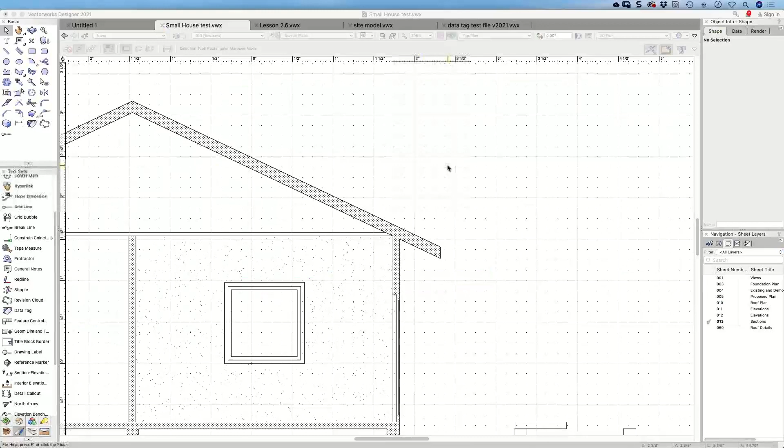I've got a little test house here that we're going to have a play with. Some people were asking what my favorite things was, and someone else would like to see how materials work in Vectorworks, so I guess we could focus on those. I haven't really played with materials a whole lot yet, so it'll be a little bit of experimentation for both of us. Richard would also like to look at the new door and window types we've got. But one of the first things I was going to look at was how to speed up your workflow.

There's this new thing in Vectorworks called the smart options, these things here, and I like them a lot. So I was going to go through those and show you what I've done with them.

Back to Vectorworks preferences, smart options display, and I'm going to choose one here. I've actually made a little palette, I've called it Pet Palette. When I go to my smart options, it just has the tools that I want to use, the tools that I use on a regular basis, things like dimensioning, some 3D modeling tools, some things like reshape, mirror, rotate, the sort of editing tools that I use regularly.

Now, there are some tools that I remember the keyboard shortcuts for, and the keyboard shortcuts are still the quickest way to work. If you don't remember them, there it is: Rectangle is key number 4, circle tool is key number 6, the polygon is 8, the walls are 9, and so on. Those are still the quickest way to get access to them.

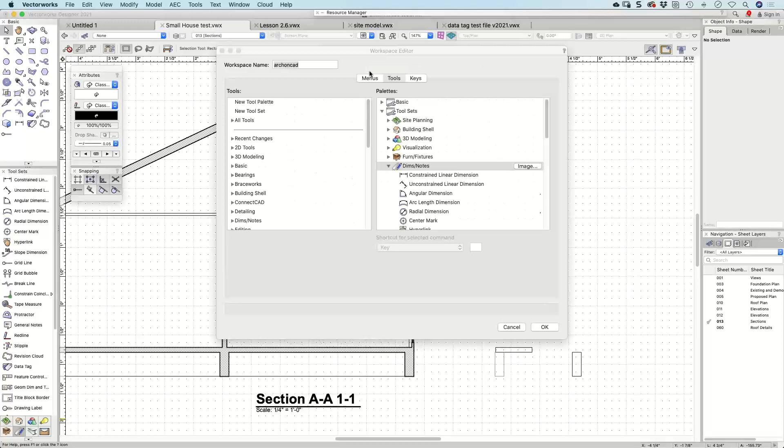And the way you make them your own is to customize your workspace. I'm going to create a new palette—a new tool set is what I need to create—and put it in here. Now in here I've got my new tool set. This is where I hide things I want to hide. Let's change the name of this and call it My Smart Options.

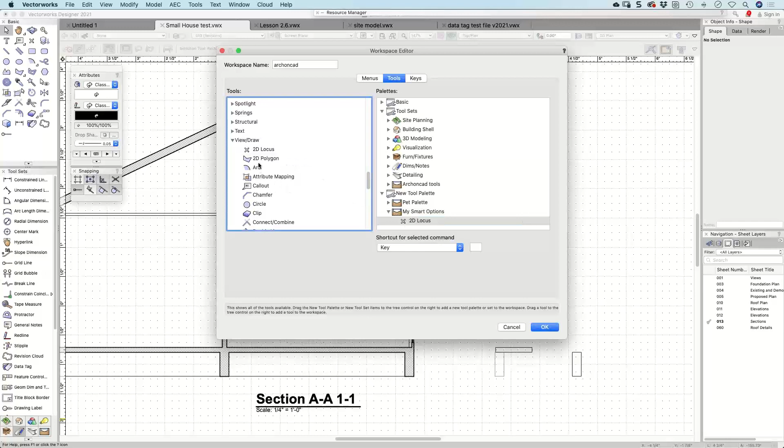So now start putting the tools that you want into My Smart Options. If you like 3D modeling tools, put those in. If you like basic tools, dims and notes, creating, or viewing and drawing tools, put those in. Just put in the tools you think you like, the ones you use all the time, and put them in here. Then you can add that to your smart options.

Just wait for my screen to update. So let's go to my Vectorworks preferences, and now you can change and put My Smart Options in there. Let's try that—spacebar, My Smart Options—and there's only the tools I put in.

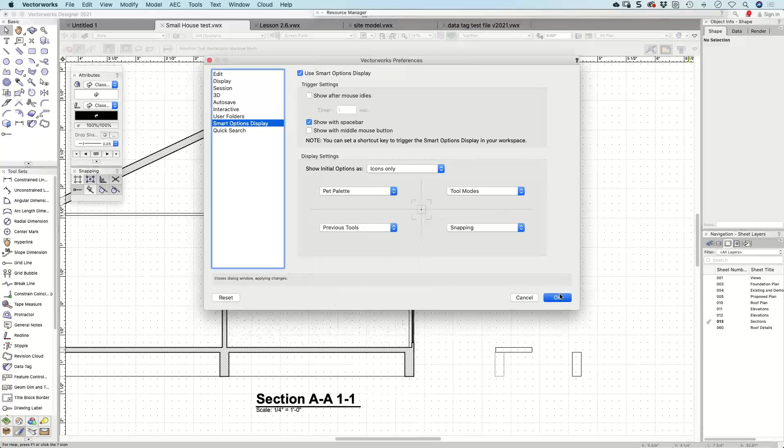So that's the way I would use the smart options. I would put in the ones that I like, and it's just a matter of keeping track of the tools I like and putting those in.

One of the things I'd like to go through today, if it's all right with you guys, I'd like to look at materials later, but I did wonder, Richard, whether I should look at something like these detail reference tools. Now, those of you that don't know what I've just done—I've set up multiple views on my screen. Vectorworks has had multiple views for ages. This is a rendered view, this is a sheet layer of a section, and this is a sheet layer view of my details. So I'd like to put these detail references on here so we can have a look at it.

So what I'm going to do is go through this one here—this is actually named Eaves Detail, and down the bottom I've named this one My Barge Detail. Those of you that have listened to me before know that when I create viewports, I'm quite particular about giving them names, naming each viewport so it's easy to find.

So I'm going to right click and edit my annotations. I've actually got my right click, or my annotation set, so that double clicking on a viewport edits the annotations. If you don't know where to get this, right click, choose edit, and set this to do what you want most of the time. If you edit the crop most of the time, set it to crop. If you edit the design layer most of the time, set it to edit the design layer. I edit the annotations a lot, so I've got mine set to edit annotations.

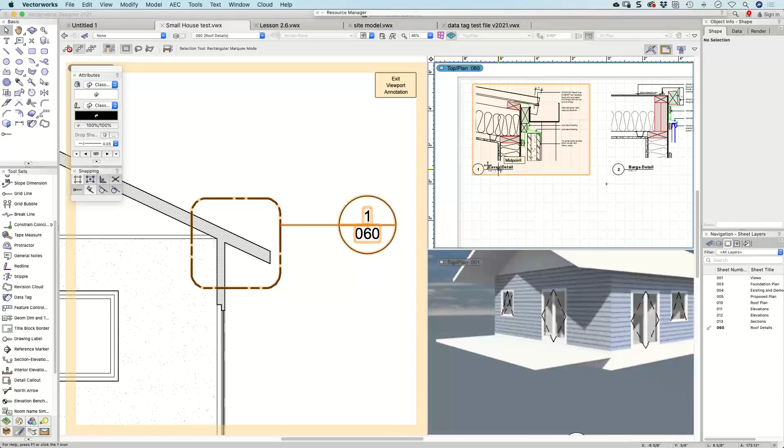lines up. Now, one of the things that Vectorworks has introduced is the ability to create a back reference. A back reference is where I tell somebody where this detail is in terms of another drawing.

So for example, this is a section, it's on sheet 13. It would be nice if I could say to a contractor, when he's looking through my details, you can see how this detail appears by looking at sheet 13.

Now, where I live, back referencing is becoming a big issue, and for building consent or building approval, some of our councils, some of our building authorities, are starting to say your drawings aren't complete unless they have a back reference to them.

So let's have a look here. So this object is now a drawing label. It's a drawing label object.

When I bring my drawing label object in, we now have drawing label objects. So drawing label objects are like a data tag, but they're not actually a data tag. They behave exactly like one, but they are a separate object.

Again, if we look at our resource manager, and we look at our small house, let's look at all resources. Now you'll notice that I've got detail callouts as a separate object from drawing labels, and they're separate from data tags. So although it uses similar technology to a data tag, it is not exactly the same, and you can't use data tags as a drawing label.

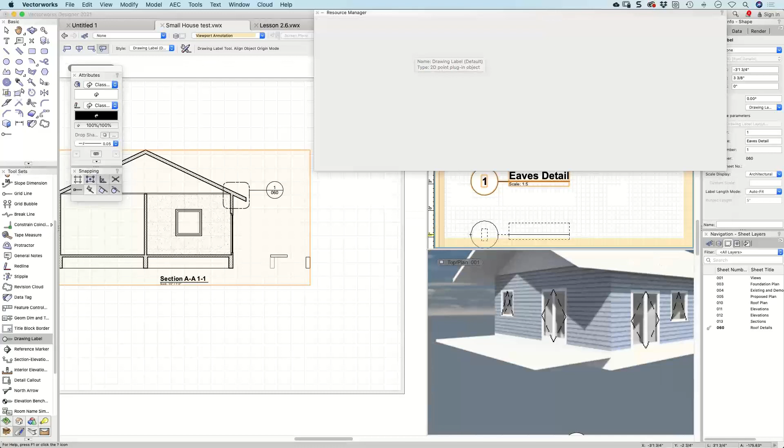I think I've tried that and it didn't work.

Where's it gone? Drawing label, let's have a look here. I think I've got some data tags here. I've actually got some data tags in my library file, but they don't show up when I'm looking for a drawing label. So it has to be a drawing label object.

So I've got this drawing label object. What I'd like to do is find that in my resource manager. Here's one here, I can't see exactly. And here's, you might notice this one, I've actually taken the number off it.

So what I'm going to do is duplicate this. This is going to be my drawing label number 2, and it's going to be drawing label with a back reference.

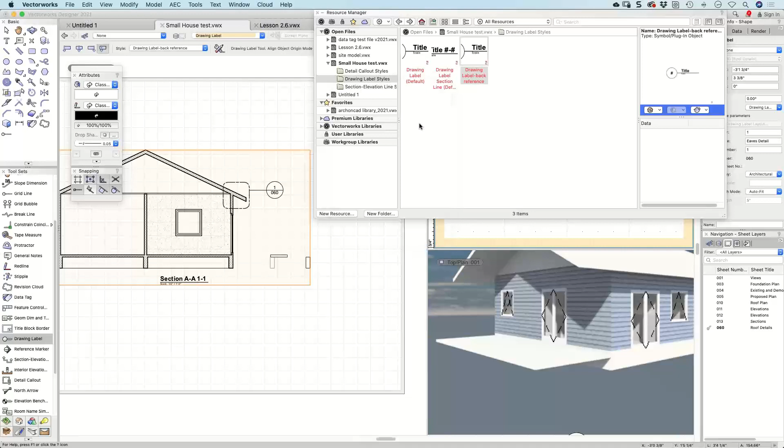Let's have a look at my back reference. So I'm going to right click, and now I'm going to edit this. And this is, sometimes I forget to do this one here where you actually edit the layout.

So it should open a separate dialog box for me to edit the layout. Here it is here, so that's my drawing number there. I'm going to lift that up to there, I'm going to copy it. Maybe I'll just drag a copy of that down to there.

Now this part here, so it's similar to a data tag, in that you've got the define drawing label. Let's end up on my other screen, hold on.

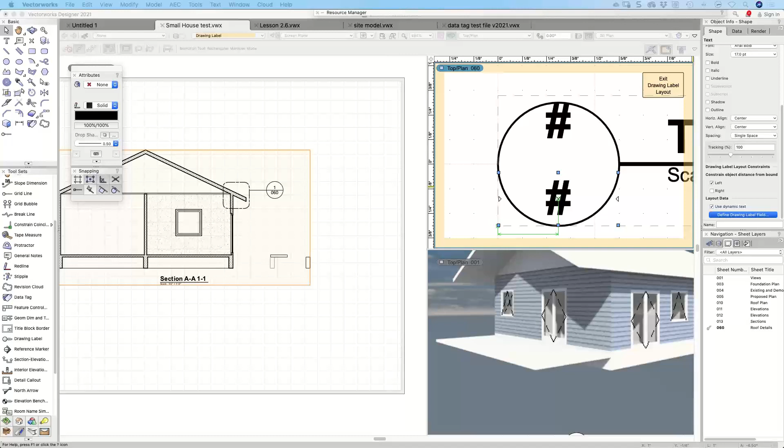So here it is, this is my drawing label. Let's get rid of all of that stuff there. And here you then choose find the back reference, add to definition. I always forget to click that one. And then when I exit my drawing label, okay, now I'm going to swap that.

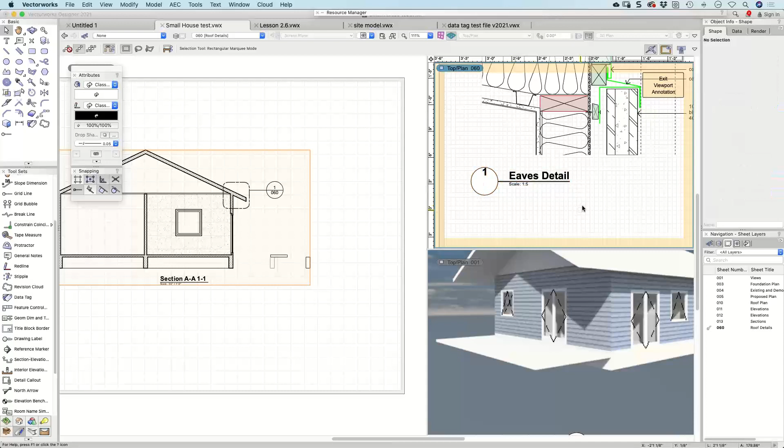Let's just replace that one with my other one, with my back reference. You'll notice it doesn't say what the back reference is yet. So let's select our back reference. When I select it, it brings up a dialog box like this one. What's my back reference? I'm going to say all objects linked to the viewport, my detail callout, which is on sheet 13. I should end up with sheet 13 now as my back reference.

I see I should have carried that line back. Let's edit this. Edit my layout again. This line here, selection, so that line there. I'm going to drag that line back to there and drag that end. So here I've got some constraints.

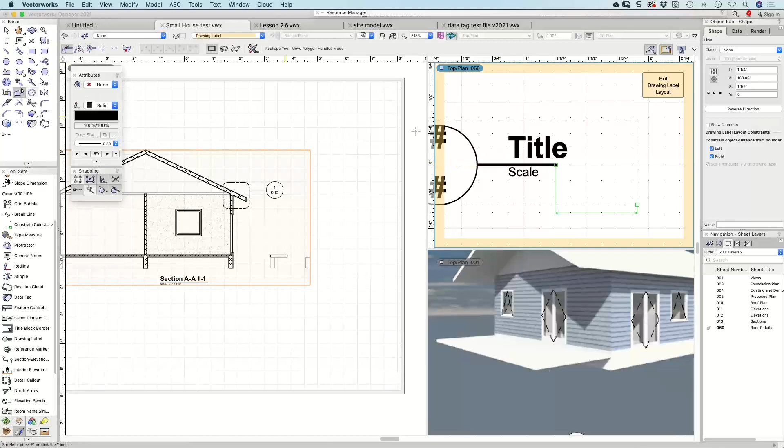These constraints are actually designed so that as you draw the objects or change the title, it automatically stretches your label, which was kind of cool. But it does catch me by surprise sometimes, and when I want to edit this, I'm finding it's slightly tricky, so you'll notice the blue handle turns up, then it doesn't turn up.

I might have to take away the right constraint. Can I add that? No, it's giving me a challenge. I end up drawing a separate line. So I'll just leave that alone for the time being.

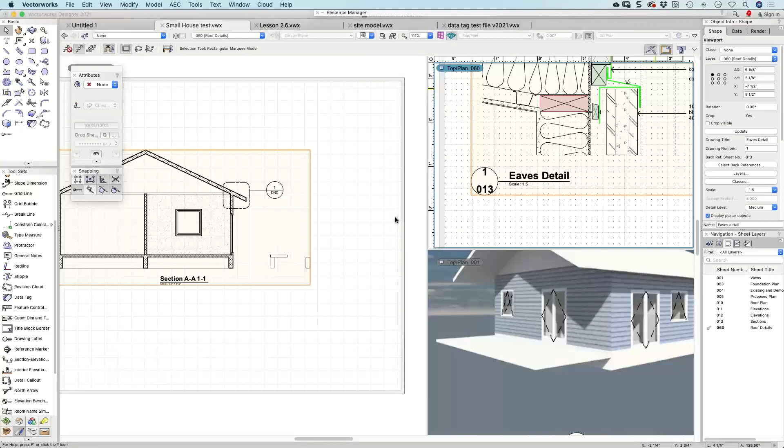But you can see how I could update that label and then it would update on that drawing, which is kind of cool. So I can actually choose where my back reference is for that, which I thought was kind of important.

Now, someone's been asking about my materials. One of the questions I've had so far is, have I updated my wall style library to update all my materials? The answer is no, I haven't, but it is something I should do. So what we could do is have a look at how materials work and have a play with those.

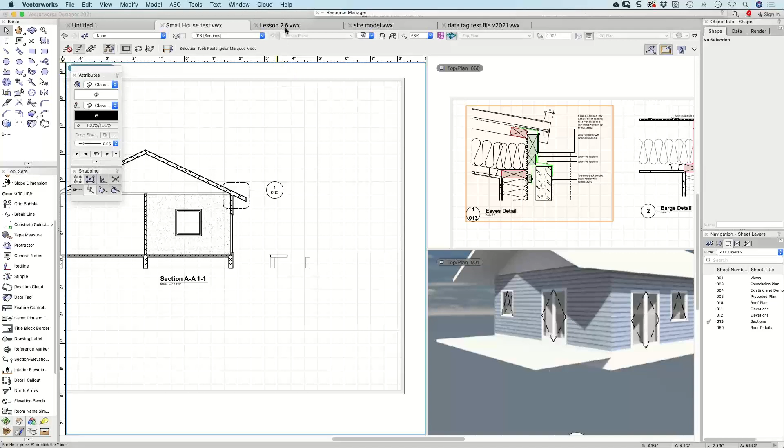So that was one thing I wanted to cover, the back referencing and my labels. And now I'm going to have a look at my library. Let's have a look. I've got a library here. Let's open my library. Since you've asked about my library and my wall style library, I may as well open it up and have a bit of fun with it.

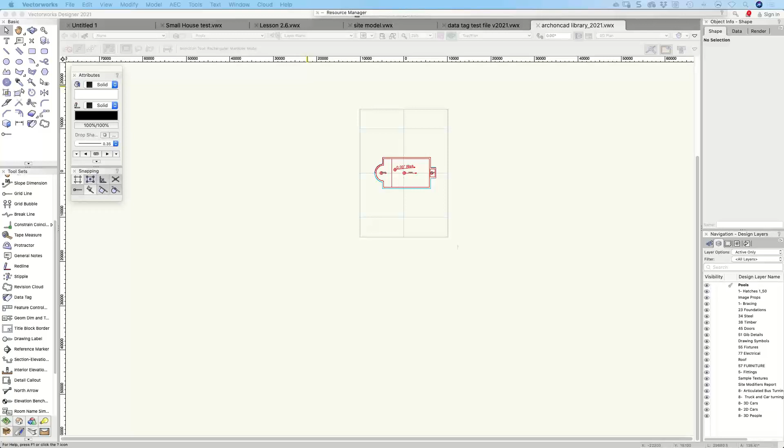I'm not sure if I've got all my walls somewhere. It'd be kind of handy if I did. So I will create a new... let's just have a look. I don't see walls, so I'm going to create a new design layer for my walls. And I should have up here some wall styles that I can start playing with.

So wall styles, there they are. Let's start with this one here. I'll just draw a little segment of a wall so I can see what it looks like, and that way I can have a little play with it.

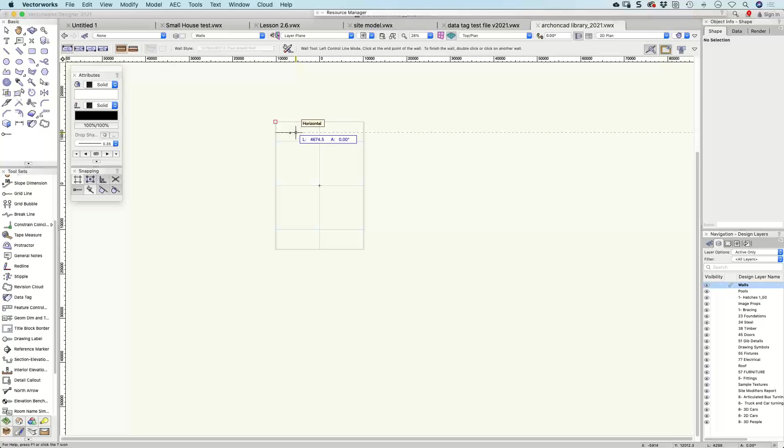Now, quite often these are using styles that don't exist, so I might have to play with these and change some so that I use something like the wall layer height and 8 feet tall. So that's my wall style, and this should have one finish on the inside and a different finish on the outside. So this is where the materials could become really useful.

So let's edit this one. We've got a cladding, which is an outer finish. Let's have a look at that. I've got a texture on here, which is a wall panel, but I'm not using materials.

So I could select here and choose a material, and I'm just using a default material. I'm actually using sheet material. This is a cement sheet. I wonder if there's any cement sheet materials.

Nope. Cement... there's cement board. Maybe that cement board would do fine. Oh, fiber cement sheathing, that's probably the one I want. So let's choose that one and then OK.

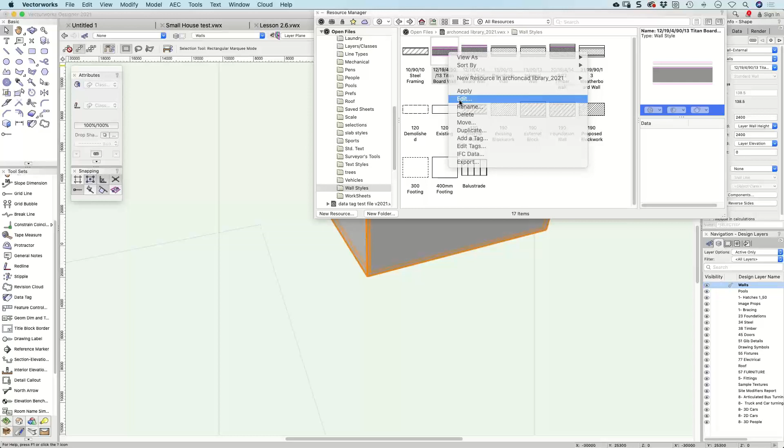I've got it on the other screen again. Okay, so let's replace all that stuff.

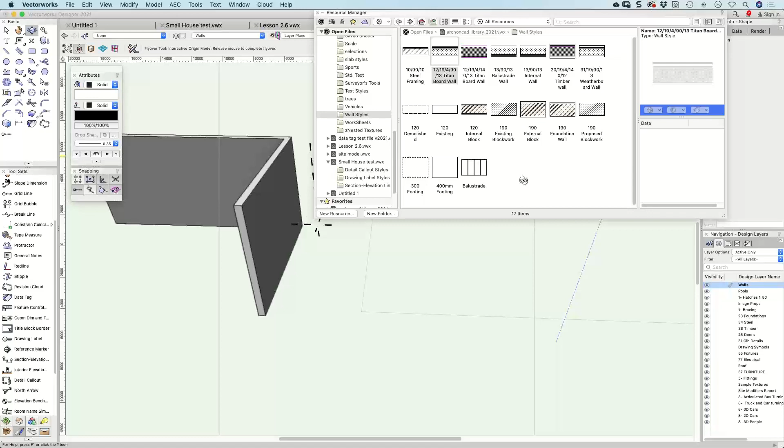So you should notice that the inside, which this is the inside, is actually an external face. Previously it had the cladding of the plywood, but now it's got this cement sheet board. The cement sheet board doesn't seem to have joints in it, which I would normally have in that material. But it does mean that I could go through and start to change some of these.

So if I go back to this one, let's edit that one. Now that I know what I'm doing, I should be able to go to the cladding, double click. We're going to choose material. Yes, we're going to use that material. Okay, okay again. And that at the moment might be the only material I want to change.

You could, of course, start to assign materials to the inside as well. So this is my wall lining, and we're going to use one called, well, we call it Gibraltar board. No, drywall. No, it's a cement, it's a sheet cladding. Sheet panel, OSB. I don't use OSB.

I was trying to look for a Gibraltar board or a drywall type finish, but what I was hoping, maybe a paint finish. Is there a paint finish? That'll do. Select.

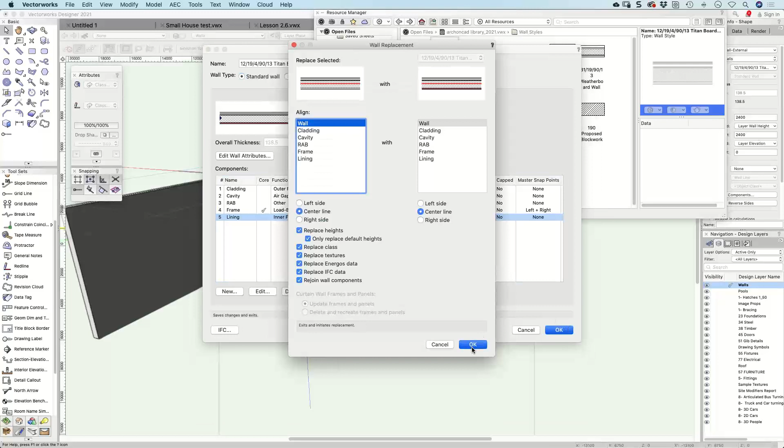Okay, so that's a paint finish on that wall now, and I should do the same with the other one, so that if I want to use an internal finish, I can then select the material I want.

Edit. Lining. Use material. GYP. Is there one there? Oh, gypsum board. Yay. Thank you very much, David. So I spelled it wrong because where I live, we spell this with the trade name is GIB, Gib.

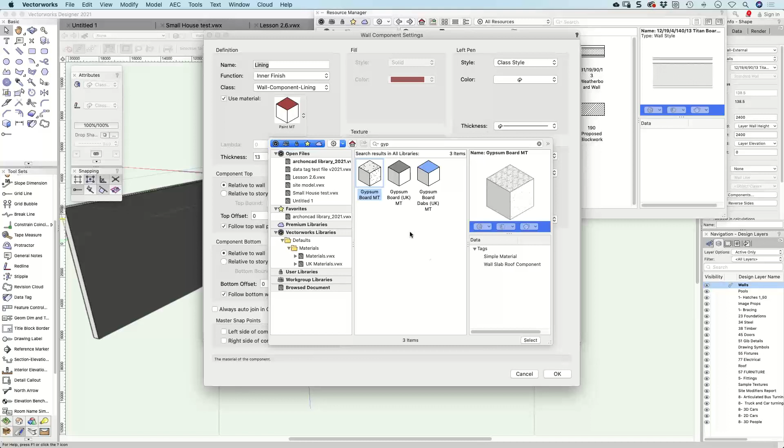So gypsum board, cool. So I can select that as a cladding. And what you might want to have is the gypsum board with different paint finish for each one. So let's select that one, gypsum board surface hatch, and it's going to put the dotty surface hatch on it maybe, and okay again. So that should be the lining on the inside of my wall.

There it is there. Let's edit this one. I think that's my paint finish on that particular one. And it's the paint. So we're going to use gypsum MT. We'll use that one again. Use material. Okay and okay. So I got gypsum there, and I should have two walls that are similar.

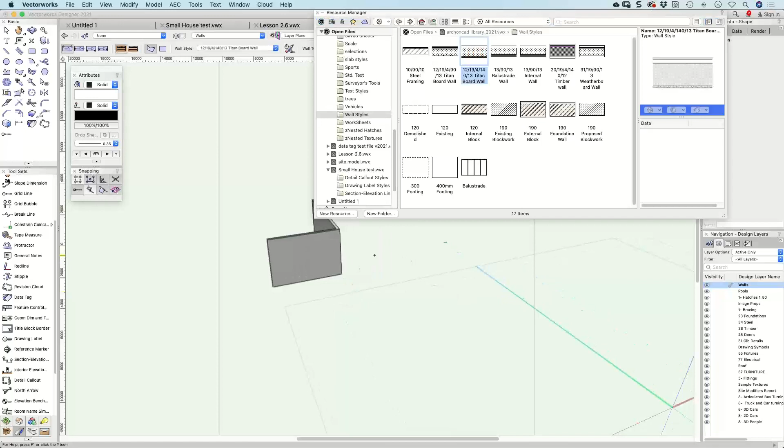And this again, I've got to tell it to use the wall layer height and 2400. So those two materials should be similar. We've got the gypsum on both walls. Now, what does that mean?

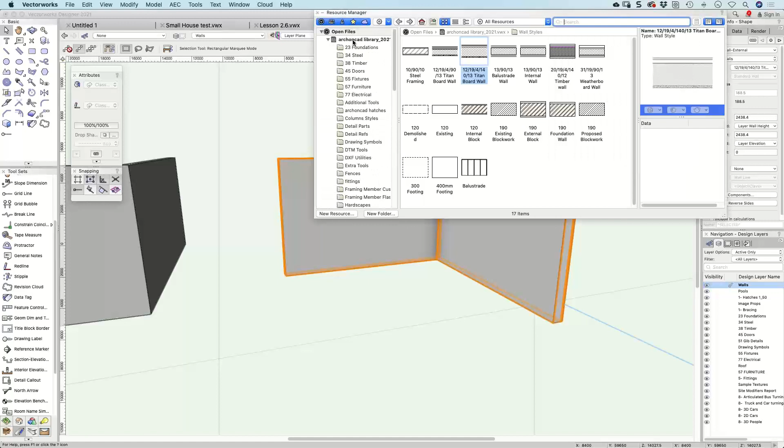So what I need to now do is start thinking about what are my materials. So do we have materials here? Materials, gypsum board, let's edit this one. So what options do we get with the materials?

We get an ability to change the texture. We can put a mark or a reference for this. We can give a keynote. We can talk about the construction of it. Do we want to report it as a volume? Do we want to report it as a component area? Do we want to put in a manufacturer of this information? What's its physical qualities? Yeah, this is going into areas which I'm really not an expert in.

But we can look at the textures. So if I say that the texture is something different, let's make it paint. What sort of paint finishes have I got? I'll change it to that one and see if it makes a difference. So I'm going to say that's the texture I want to use.

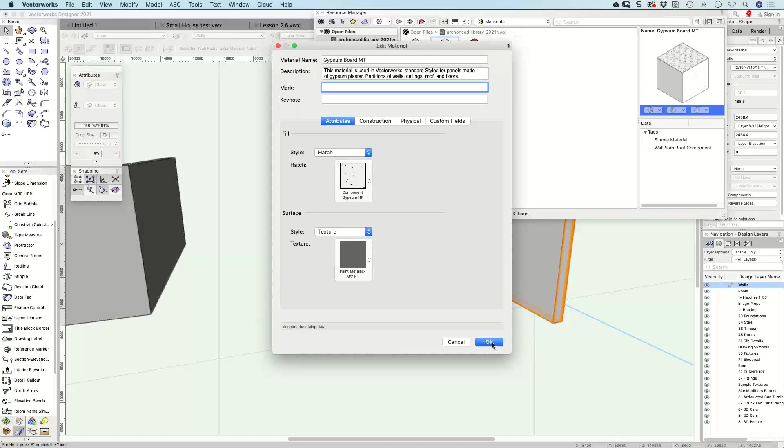Okay, downloads it. And both of those walls have updated. So I haven't had to change the texture. By choosing the material, I can then make sure that material applies to each of my objects.

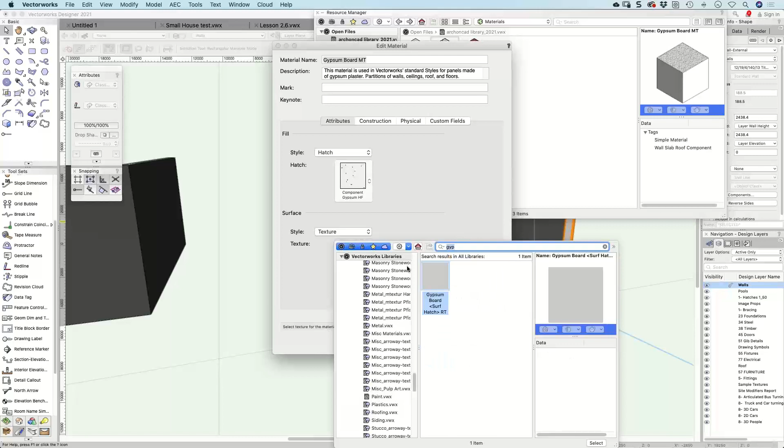So if we go back to, is it gypsum? Surface hatch, let's go back to that one. Okay. Now the surface hatch should actually appear in a rendered. So if we go back to a hidden line rendering, you can see the dotted outline of the gypsum on there. That should mean that I can then go back to my fiber cement sheathing and I can edit this

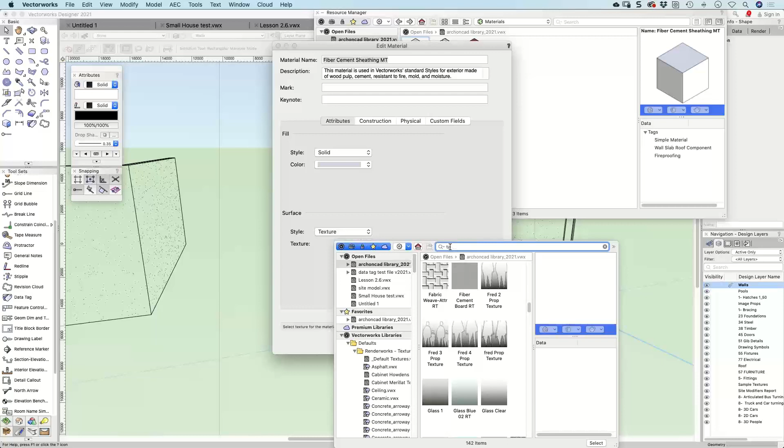and assign a different hatch to that or a different texture. So for this, for example, Tadao, I think I got a Tadao Ando concrete texture. So let's go back to OpenGL and let's spin our view around, and we should see it looks more like the sheathing or the material.

And that should be quite cool, because by changing the material, by saying these objects have the same material, I can now start to apply materials over the entire project, not based on classes, not based on wall styles, but based on materials, which I think should be really powerful.

I don't know if anyone else has got a question about the materials. Brian, it does mean I think that I would have to go through my entire library.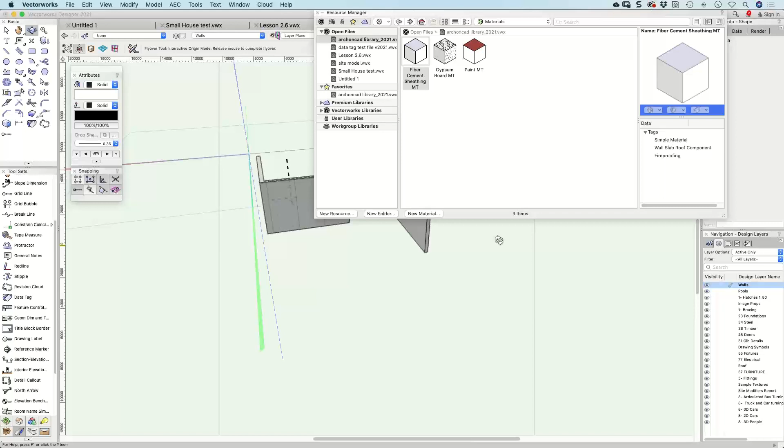Let's go back to wall styles. These are all my wall styles that I use on a regular basis. So it would mean going back through these and changing some of them that use cladding systems and updating them to use the material objects or the materiality.

So Richard's got a question about that. Would you classify objects based on function, not material? That's a good question. Do we want to base material? Do we want to classify?

Well, don't forget, let's go back to this. Materials and classes are for different things. For example, I've got a set of drawings here. Let's say I've got an exterior cladding, I've got an air gap, then I've got my rigid air barrier, and I've got my internal lining. Those are still classes. So I still want to turn those off based on classes.

If we go to here, let's have a look. I think we've got classes starting with wall cavity. So I want to turn off my cavity. I want to turn off my cladding. I want to turn off my lining. The cladding is the

material. So at the moment it's a little bit unclear, I think, whether you're going to use materials for that or classes for that. Now the answer, I think, for me would be: in 3D, you're using materials. But for producing drawings, you might use classes to control visibility. But you may not need to use classes to control materials.

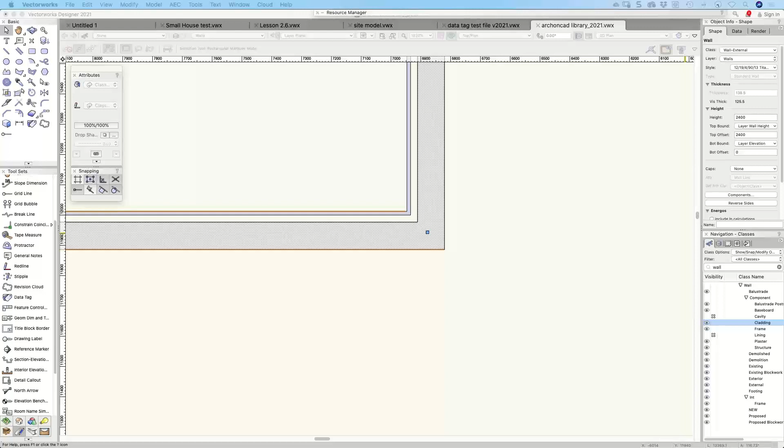Let's edit a class, and I'll see whether I can control the material as well. So we've got graphic attributes, we've got textures, we've got descriptions, and we've got visibilities. But you notice that we don't have materials on that. I'm starting to think about this—materials have only been here for a short time, remember?

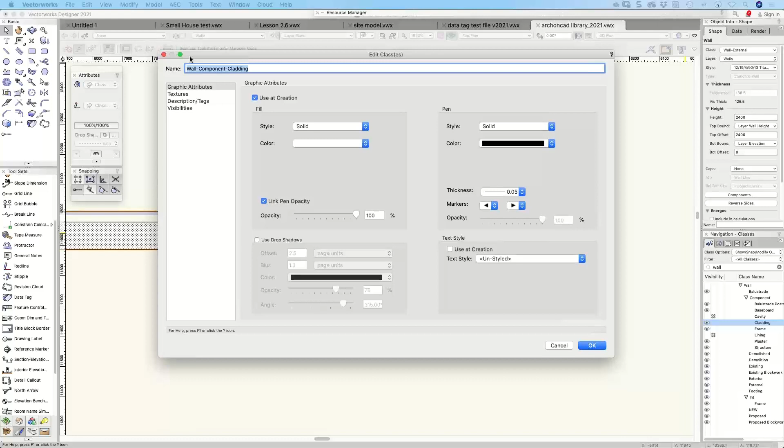So I've started to think about using materials, particularly if you know that you've got a building with some steelwork and all the steelwork's painted the same. It's easier to apply a material to that, I believe, because you know that material covers all of that.

So when we use a material, for example using the steel column, we know that all my steelwork's painted the same. It's good to apply a material to that, I think, rather than a class, because I might want to have steel columns shown at the time where I don't want to see my steel beams. So beams and columns might be on separate classes, but they're actually made out of the same material.

So I think that these are for different reasons. I don't think you can use materials instead of classes, or classes instead of materials. I still believe that classes are a great way of controlling visibility, but I think materials are probably a great way of controlling the graphic style in 3D of those objects.

Because you could have two columns that are the same class but different materials. You might want to paint all your columns a different color. Therefore you'd want to have all your columns different materials, but on the same class, so that for your drawings you can turn them all on and off at the same time.

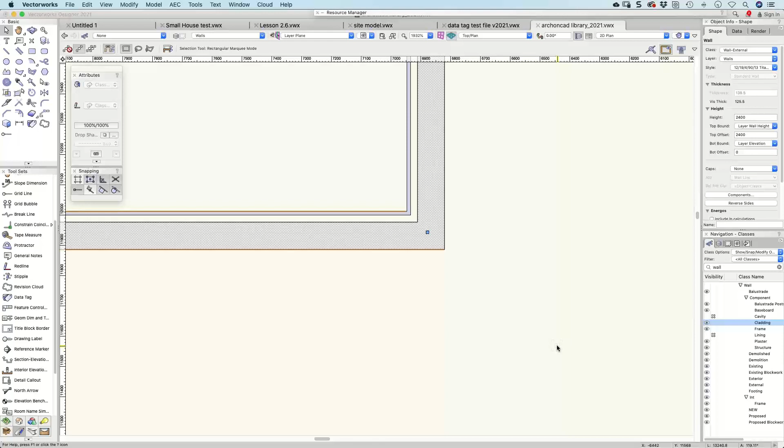People have been asking about materials for a long time, and now we've finally got them. I think it's just going to take us a little while to get used to using them. But as you say, Brian, I'm going to have to go through this, and I'm going to have to update this to make it work for me.

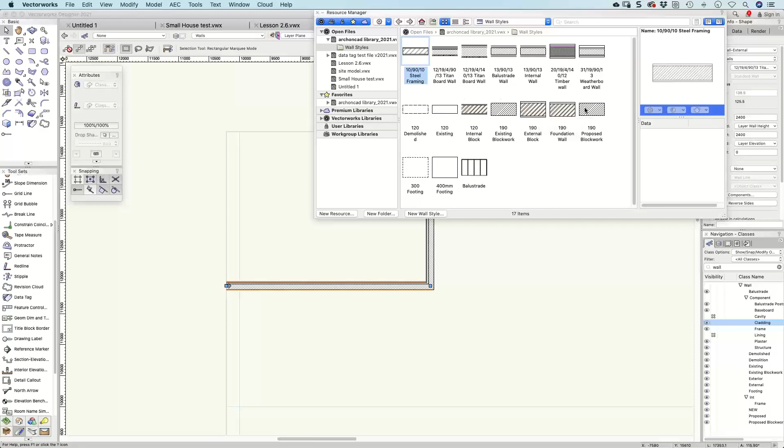My footing is just pure concrete. This is a block wall with plaster on it. So I'm going to have to think carefully about these. Let's have a look at this one.

Let's edit this one—my insertion options. This one has no components. So those are my insertion options, textures. And you notice that when I go to textures, I don't get the material nature of this either.

So if I go back to here and I create a new component, then I can assign materials. I can't assign materials to the entire wall, but I can assign materials to components of the wall. So what you end up doing is putting the wall—let's use a material. This is concrete block, concrete, what do we call it, CMU.

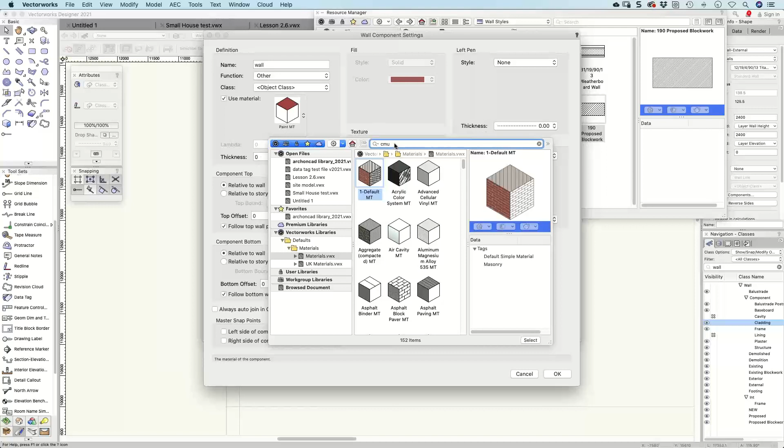So I can choose that, and that will pick up some of that information and whether it uses the class or not. So some of my walls I need to change and some I don't. So at the moment, Richard, that's the best I can do for materials to explain how they work. I hope that's covered it. And Richard, I think you're also asking about the doors.

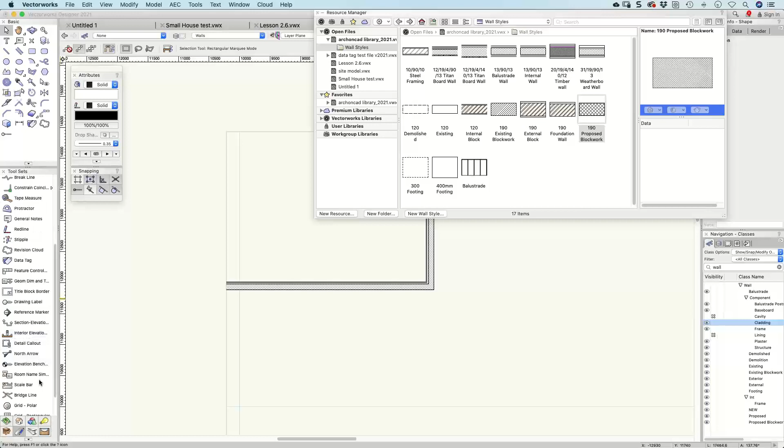What can we do with the door? I haven't had a good look at the door options to see what they've changed. So we have swing doors, barn doors, double swing, double egress, folding.

Let's do folding, double bifold. I think there's still a challenge - you can't have 3 on one side and 1 on the other. And for configuration, folding, swing, we can have an opening, cased opening.

We've still got sliding, swing, single leaf, double leaf. We do have the opportunity to have some open, some closed. I'm not sure if that's new, but I'd have to play with those.

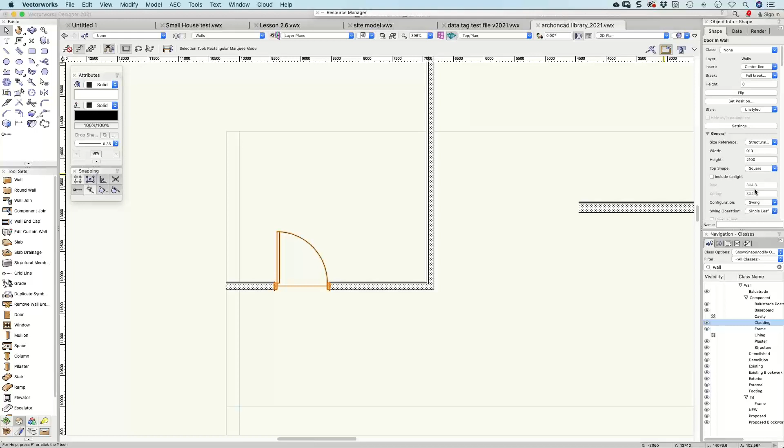I think, Richard, you probably know I don't use these doors very often, I use another one. Let's go back to the settings. Should we make it wider?

So you can do more leaves with sliding doors. Let's do sliding, so we can do multiple. Oh, what about multiple bipart? What can we do with that? Leaf number 4, can we do 3?

Doesn't like 3. It'll do 4, but it won't do 3. Multiple, 4 going one way - that's not bad, you can do 4 going one way. Can we do 3 going one way? Yeah.

Can we do 5? Can we do 10? Oh, look at that, cool. So you can do odd numbers there. And you can also choose whether they all slide or whether some slide. Which one do I want? XXO I thought I wanted, to the 3X's.

So we got those sliding ones, multiple. We've done the multiple. Let's do pocket, single, multiple. So we can do multiple pocket doors, bipart, double bipart, and single. So I guess that's new, isn't it - the ability to choose those pocket ones.

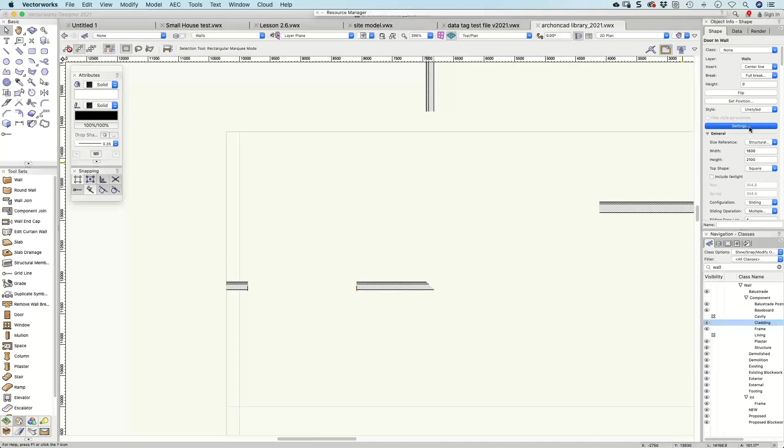Single, what else is there? Look under configurations, I think I've done that, haven't I? Yeah, configuration, so I've had a look at those. We can do kick plates - we could do those before. Second leaf - well, second leaf might be interesting to look at.

Let's go back to the settings. Let's go to a folding door and let's look at the second leaf. Oh, can't turn that on. Leaf, flush, glazed - I don't think that's changed much.

Configuration, pocket, okay, and sliding. Okay, so there's some more configurations here. Back to the general - so we're going to go sliding, multiple, we'll do 3, and sliding. So use style, width, size, leaf to clearance.

If I go pocket, I've got more choices. Barn door, I've got even more choices. I guess you can do a bit more with your doors.

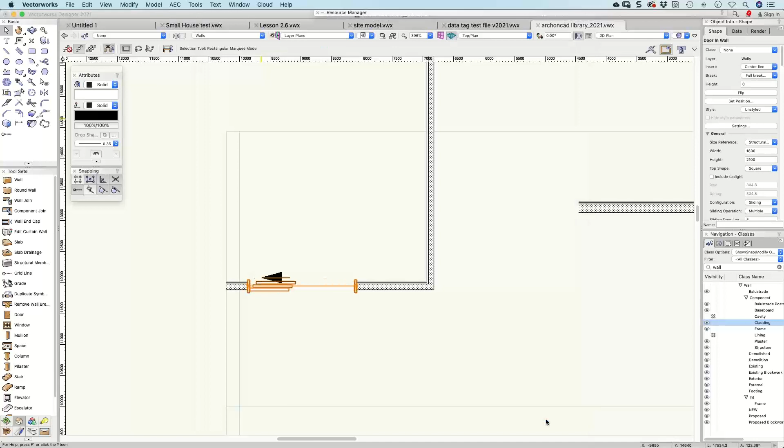What other questions have we got? So we've looked at materials. There's not a whole lot of questions, Barbara. I know, everybody's very shy or very at peace with Vectorworks. Someone wants to look at stairs.

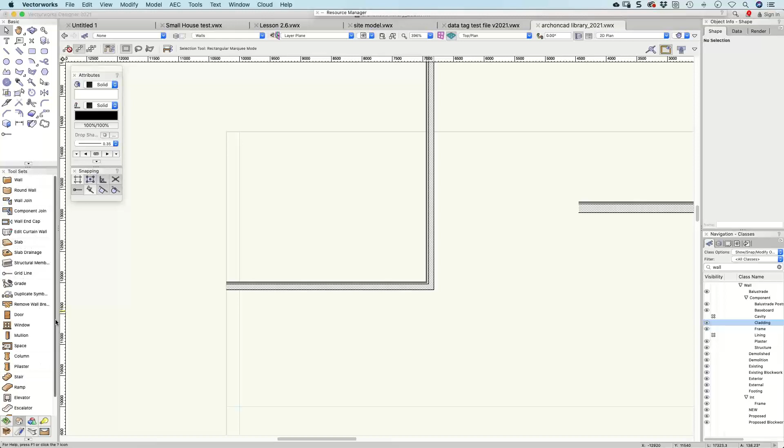So James, did you want to look at the regular stair tool or the custom stair tool? I've not played with stairs much. Has the stair or the custom stair tool been updated?

I can't recall that they've updated particularly the custom stair. Those of you who don't know, there was an old stair called the custom stair, which I still find really useful. Handrails have updated - the ability to do handrails and have them joined together, that's updated quite a lot. Let's have a look, custom stair.

All tools - so custom stairs have been relegated, you have to go looking for them. Custom stair, there it is. And I quite like the custom stair, I normally add it to my workspace because I still like it. It does things that the other stair doesn't do.

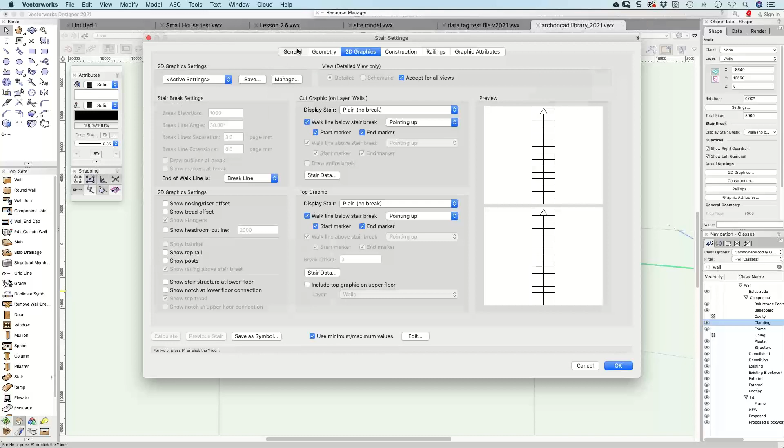So standard stair looks pretty much the same. 2D graphics - oh, I better change a standard stair configuration. Let's choose one of those. An L stair.

2D graphics - so this you can still use the construction geometry. That's the one, so you can still change the angle. I think I can change it to 105. Make that so you can still change that. That was there before - I don't notice a whole lot of differences to this dialog box at the moment.

I tend to change these ones. So if we go back to my tread depth, this is 280 and 165.

Now 166 will do. I didn't like it, so I'm going to change this offset 1 here to half a tread, which is 140, and then lock it so that when I make changes, it won't unlock. 140 there, lock that again.

What would be ideal is that as you make changes to the stair, as you change treads, you've locked the relationship between that corner and the start of that tread and the top of that tread, or the top of that riser, and the start of the angle. If you don't lock it, every time you make changes and take one stair off and add one, let's say if we make 7 at the bottom, you'll notice that because I've locked it, it doesn't change that relationship.

As soon as you unlock these and start changing this from 8 to 9, you start getting a different relationship and they start moving around. So it pays you to change these and lock them. I usually use half a tread, which usually works out pretty well for the handrail.

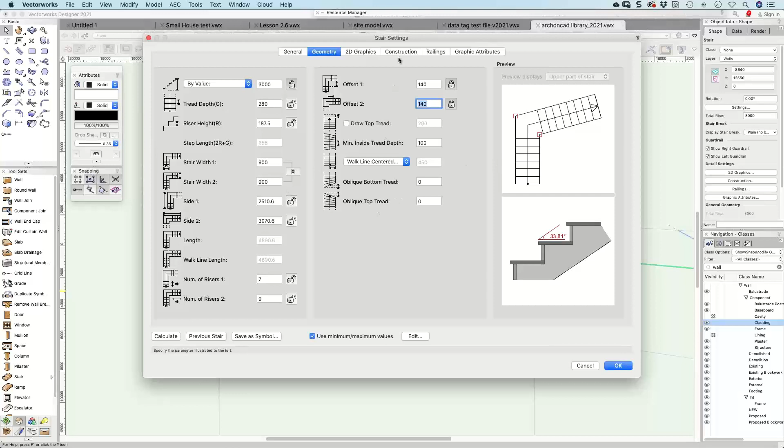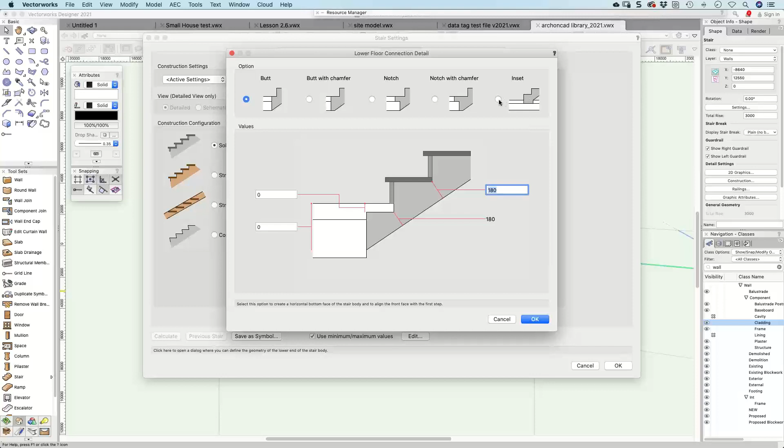But let's have a look at construction. I think the construction looks pretty similar. They usually change a little bit with these floor connection details so you can play with those. Quite often with the lower floor, I don't connect it to that part. I tend to make that a 0 as well, so that it just sits directly on the floor - one like that, pretty much like that one. So it just comes down and sits directly on the floor.

You can change the upper connection detail. And that should sit my stair on the floor again. So there it is - you can see my string comes down and sits flat on the floor.

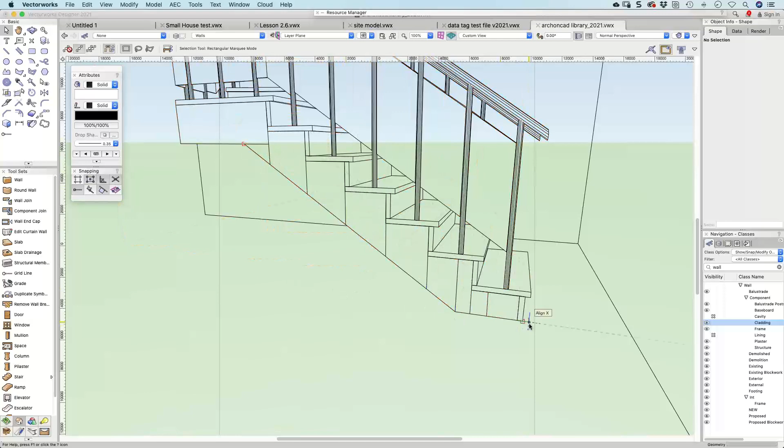When we render it in hidden line rendering, you can see all the little pieces that make up the stairs, and there isn't a lot you can do to get around that. In OpenGL, you don't see it. We've still got the same, I think, configuration for the handrails and the guardrails for the stair. And the custom stair - I don't think they've made any changes to it.

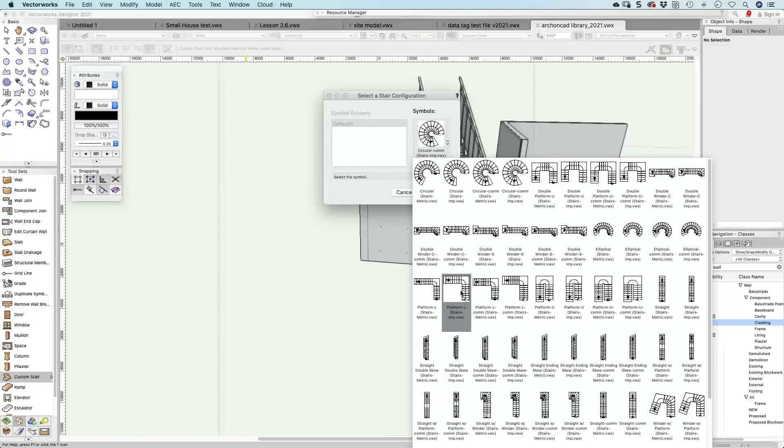So we'll choose one that's similar. It goes up, turns the corner. We've still got the same type of configuration, I think - we've got flights, the width's the same, the angle is -90. It's the same sort of stair. The style is closed and sloping, and its construction style is monolithic.

I quite like using this particular stair for really quick design. I find it really handy. If you open this up, this one you have to manually calculate. So side one - let's go back.

Previous. So let's say, for example, I like using 900 wide stairs, number of treads 7. Let's go to the next one - side 2. So the start width should be 900, the end width 900, the length of side 1 900 plus 140.

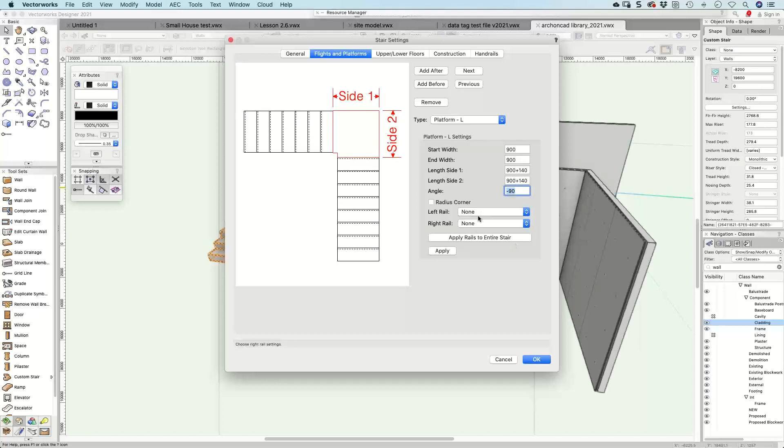In other words, go back - you physically have to add this, 900 plus 140. I should be able to do this in my head, but I'm not going to. Apply, and let's go to the next one. We'll make this one also 900 millimeters. Apply that.

So I should end up with the same configuration - half a tread before it starts, half a tread there. The handrails for this custom stair aren't as nice as other things.

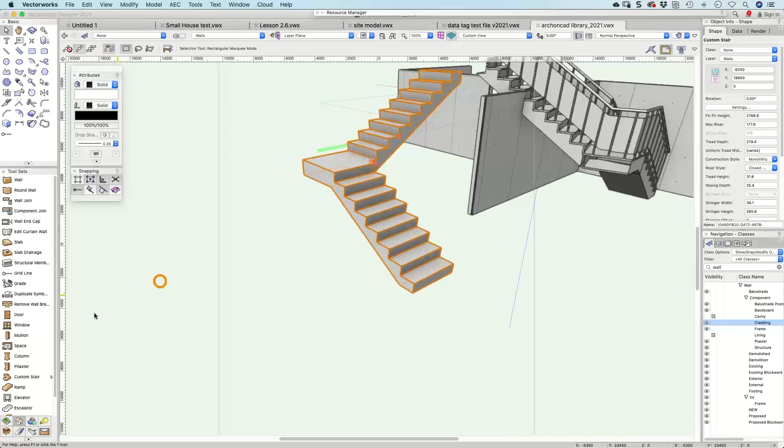Now, if we go back to the handrail tool - I haven't practiced this, remember, so I'm going to have to do this on the fly a little bit. So I've got a handrail that starts here, goes to that point, starts here and goes to that point, and starts here and comes down to there. And they don't quite join neatly - you can see they're just slightly off. That's partly due to my clicking.

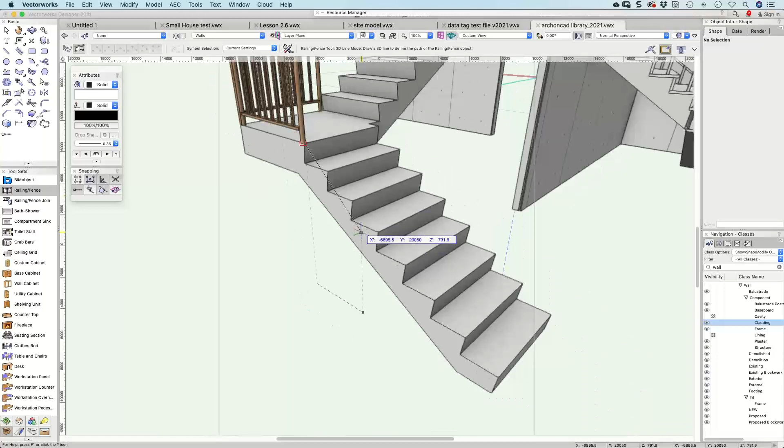Let's try that again. So I'll go from that point at the top of the stair down to the bottom, and hopefully they line up this time. It's not bad - you can see I've got extra things at the top there. There is now this new fence join tool. As I said, I haven't played with this one, so I'm going to try it out and see how it works. So I'm going to join that one to that one.

It doesn't like it. Why doesn't it? Oh, maybe it doesn't like joining unless it's on a corner. But that would be an ideal one, I would have thought, to join those together.

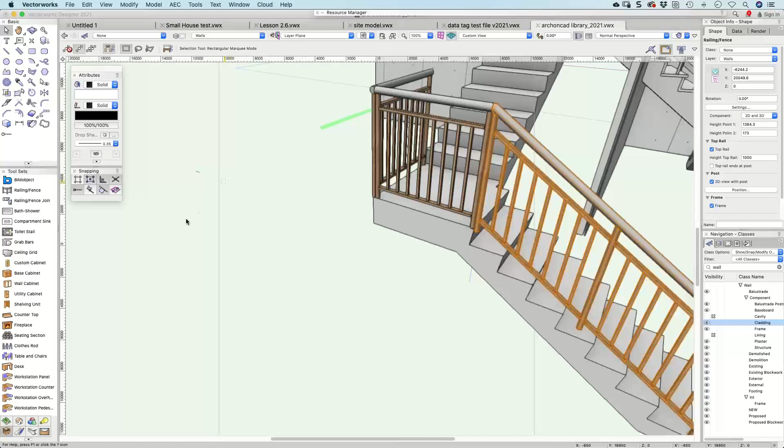Let's try joining that one, join that one to there. So there's options here about how we join them together - sloping fix, top rail height. Let's try the top rail height one and see what we get. So let's join that one to there. Still doesn't like it.

Let's turn that one off. It still won't join. I would have thought that would join, but obviously it's giving us a fight. So I'm going to have to play with that and see what options we've got for joining those, but it was supposed to be able to join these together.

Let's try dragging that one to there. The examples I've seen are more like this with the railing fence, where this one comes up from there to there, and then you can join those two together.

So let's grab that one. Let's try that again. No, it just says that won't join those two together, which is a bit of a pain because that would have been quite cool.

Oh, maybe I need to do the top one in the top plan view. We'll try that. Fence, railing fence, let's do this one. So from there to there. Oh, now it's at the wrong height. There.

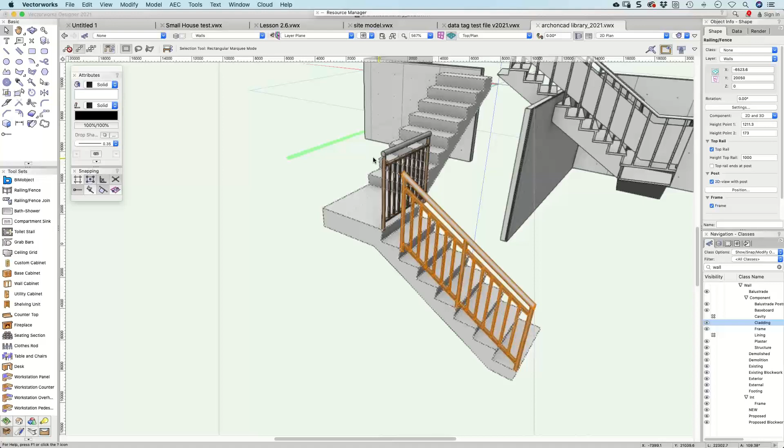So this is the last attempt I'll have at this. If this doesn't work, I'll have to go away and find out how to make it work. Yeah, all right, so there is the new railing join tool. The movie I saw made it look real easy. Obviously, I'm having trouble with it.

What other question have we got? So the custom stair tool hasn't been updated, not that I could see. But one of the questions we've got is how do you make windowsills white colored like a conventional graphic? Let me have a look at that question.

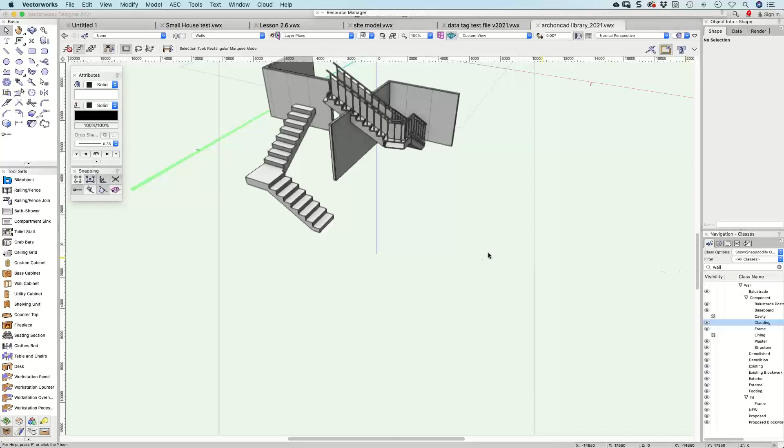So you want to do a windowsill, which is different - am I right, Will, in thinking you want to do a different windowsill? You want white windows, but that's limiting. Windowsills pick up the general window color. Are you sure they pick up the window? Have you tried playing with the classes of those?

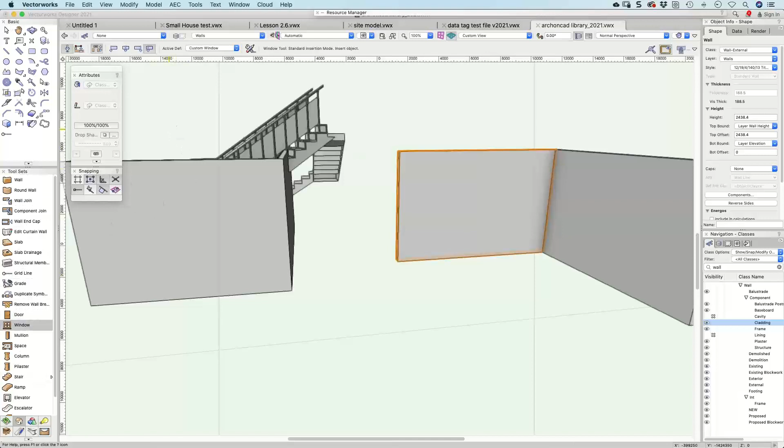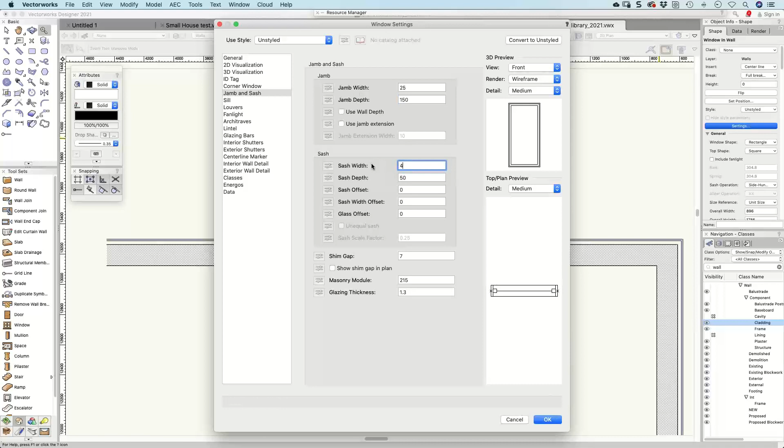Let's go back to a window. So there's my window object there, and let's have a look at that. Settings, got a rectangle, let's have a look. Jamb, where's my jamb and sash? So my jamb width is 25, let's make that 150. Sash width 40. I want to see if that looks more like what we want.

Okay, so if I'm understanding you correctly, Will, you want to change this graphic color of that jamb and windowsill. Or do you want the windowsill a different color from the jamb? I'm not sure what you want.

Okay, so when we go to settings, can we not go through the 3D visualization? Where's the classes here? So interior jamb is on a separate class. Where's the 2D visualization classes? Okay, so let's make a class for the interior jamb.

Window interior jamb - window, we'll make a new class for this. Interior sash. Interior jamb, interior sash, okay.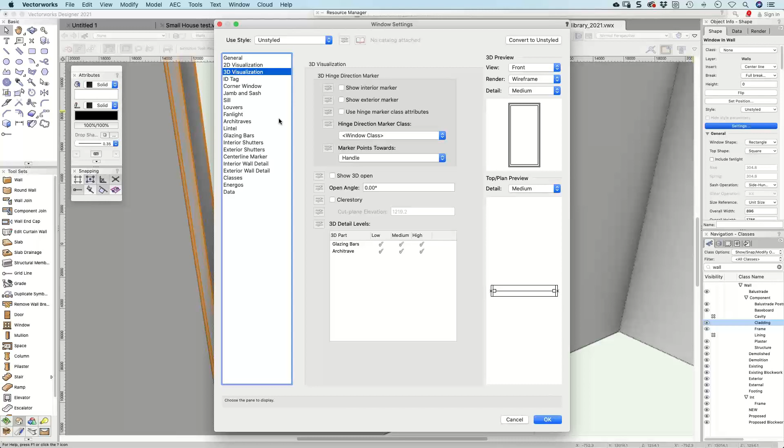3D visualization, okay. Now I'm wondering whether I can use those new classes to control the graphic style. So let's go to my interior jamb, let's edit that. We'll use at creation, we'll change the color to - how about we change it to pink.

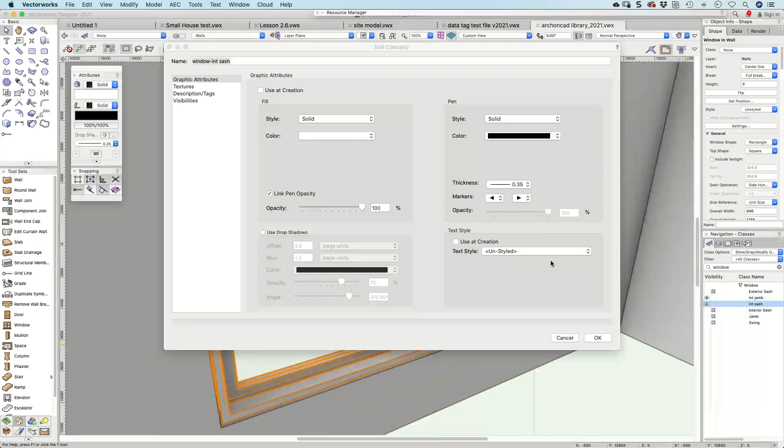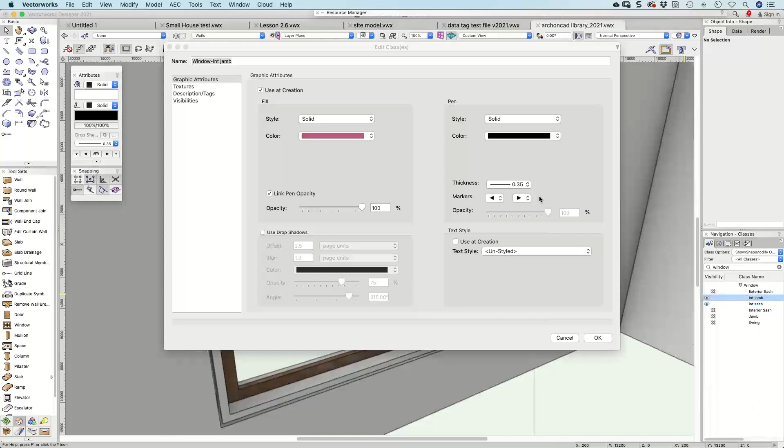And the interior sash, let's edit that. We'll make it black this time. Use at creation, we'll make it black. Maybe we need to use a texture as well. So we'll give it a brick color, that should be odd. And if we go to the interior jamb, let's edit the interior jamb. We'll give it a texture. Should we give it water? That'd be weird.

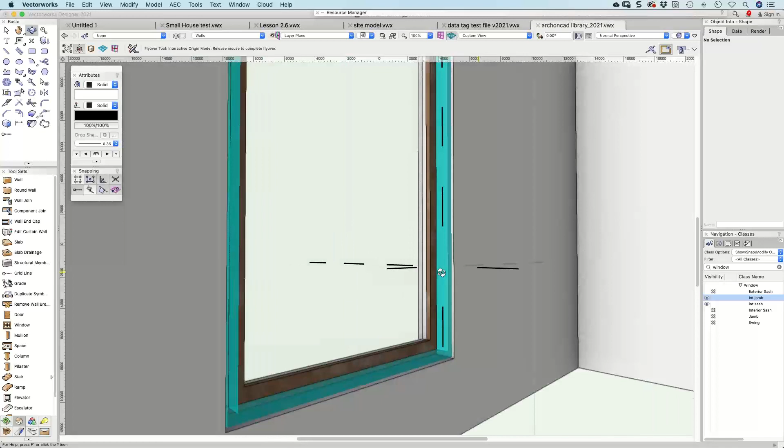So my suggestion, Will, is if you want to make them in 3D different colors, then use classes to control those jambs and sashes that way. If you're talking about in plan view, you want the frame and sash dark, but the sill still white.

So, Will, I think what you're trying to do is you want the frame to be that color, but you want the sash piece to be white. You can't do it traditionally. What I suggest you do if you want that to be white is to put a little rectangle there, extrude it. What have I done with that rectangle?

Let's do that rectangle again. So I'm going to use my rectangle tool, start here. I'm using that mode, so there, extrude it by 1/4 inch, 6 millimeters, and then you should have a separate object there that you can then play with. Where'd it go?

For some reason it went backwards on me. So I could give that a different texture as well. So you could use that as a different texture.

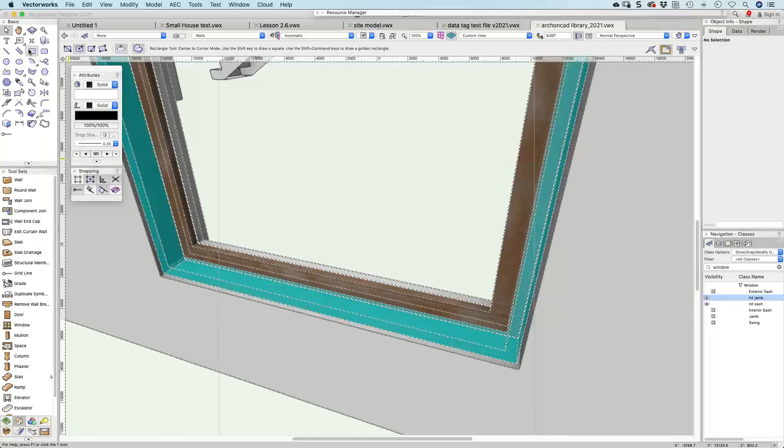And then back to my interior jamb, let's edit that. Textures here, put that back to what we used on the other one, which is that color. And so now I've got a separate piece that I can choose. I can also then, of course, make changes to that.

Where's my push-pull tool there? I can also grab that face there, and I can pull that face out, and I can make that sill any depth that I want, which will be separate from your window. But it is a separate object, and it does mean that you have to go in and make that change to it.

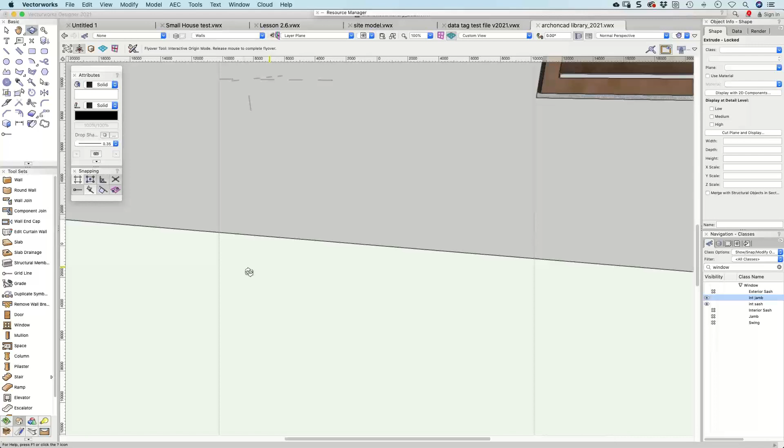So Richard, that would be my idea for the separate sill. But you need to be looking at it in real detail for it to make sense. And in 2D, I'm not sure you can do that. Let's go back to that.

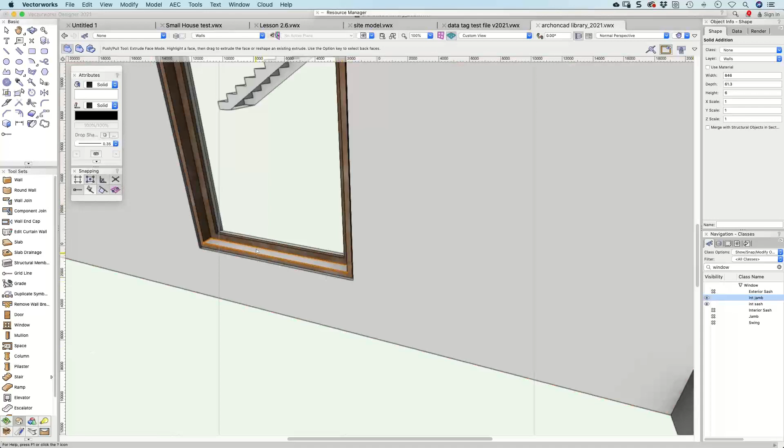Settings, 2D visualization. So you've got the jamb here and the sash and the sill. So let's do that by class, but this is only controlling the line weight, I think, of those objects. So if you change that sill and make it window...

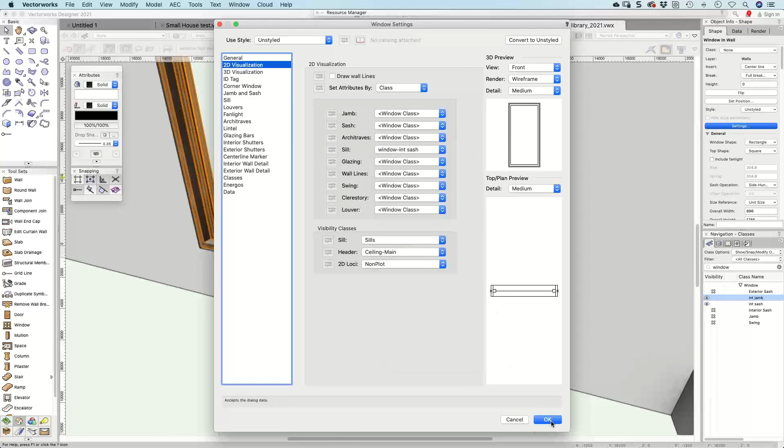Interior jamb, where's interior sash? That one, interior sash. Let's do that. Let me delete my little piece of 3D modeling I made. So if we go back and edit this, you can see I've given it that color, but it's not shown up here with that color.

If we change that class and give that class a heavy line, it doesn't change that either. Let me go back to my window.

Settings by class, set attributes by class. Sill is using that. Let's make the jamb the same. Window, interior sash, and you can see it, then it gets really heavy. And window class, now it's light, but you can't see the difference when I choose the sill here. You should get a heavy line for the sill, but you're not getting it.

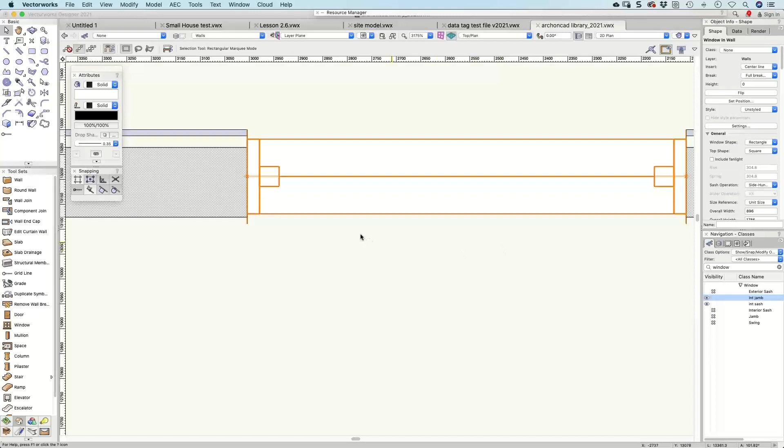Are there any other questions under jamb and sash? So Richard, I've done that, haven't I? Gone to the jamb and sash and not got what I want, because what we're asking for is a sill through here in 2D that looks different from the sill in other parts. But we're not getting it.

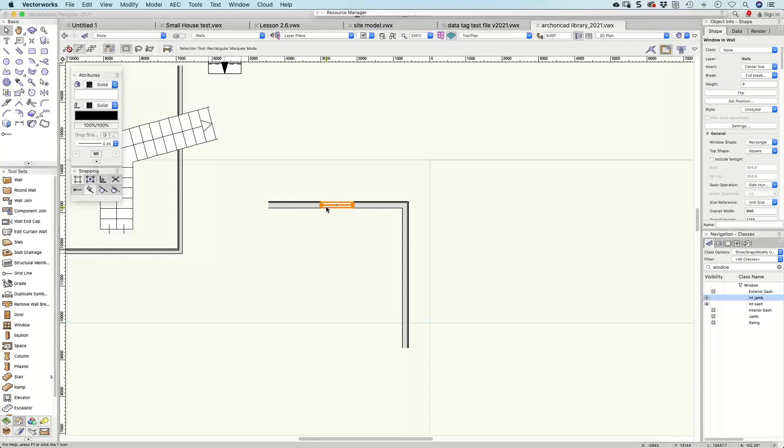I'm just curious how much detail you need to go to for that, because if you look at some of the drawings you have to do, it's not easy to see the jamb and sash difference unless you zoom into a bathroom type detail.

So do we have any other, how are we getting on for time, Barbara? Oh, we just got out of time. I think we ran out of time.